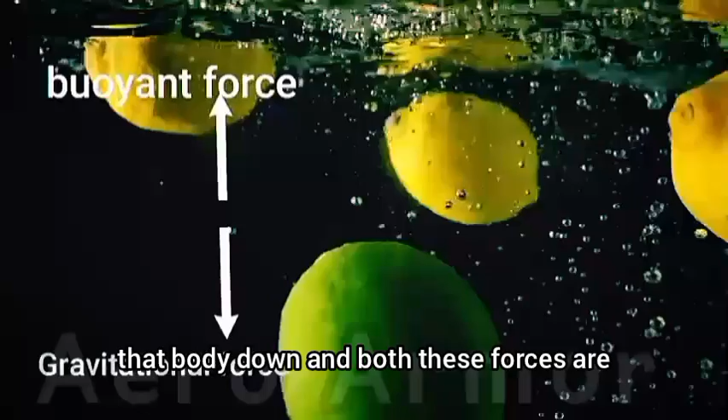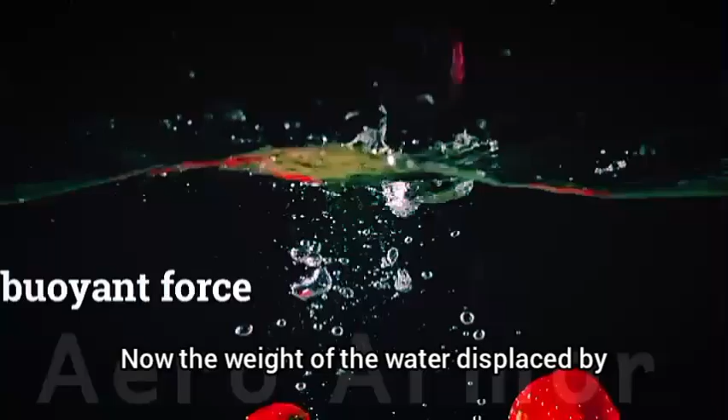When any body is in water, the water exerts an upward force on that body, which is called buoyant force, and the gravitational force tries to pull that body down, and both these forces are available in the water. Using buoyant force, Archimedes gave a principle that when a body is immersed in water, that body will start displacing water. Now, the weight of the water displaced by this body will be equal to the buoyant force exerted on it. It is very good, but still we do not understand anything.

The weight of this submarine of ours is 48,000 tons. When it stays above the water, it is assumed that it can displace only 40,000 tons of water. Now it will be equal to 40,000 ton buoyant force, which means 40,000 ton water is exerting upward force on this submarine. But I just told that there is also a gravitational force whose formula is mass times gravitational acceleration.

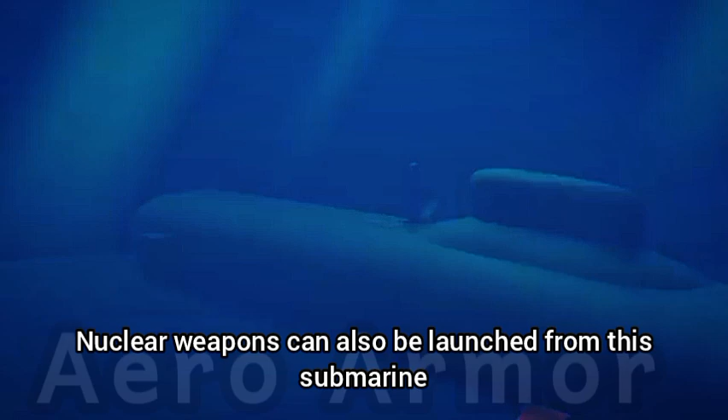The large ships displace a lot of water so that the gravitational force does not dominate and the ship moves comfortably on the water. The Typhoon class submarine is still with Russia, whose power we are yet to know. Nuclear weapons can also be launched from this submarine, and it simultaneously carries so many weapons that the whole Earth can be destroyed. This submarine is 574 feet long, 76 feet wide, and 38 feet tall.

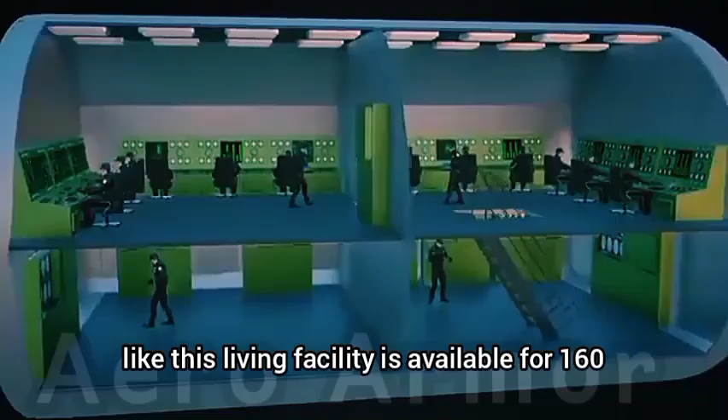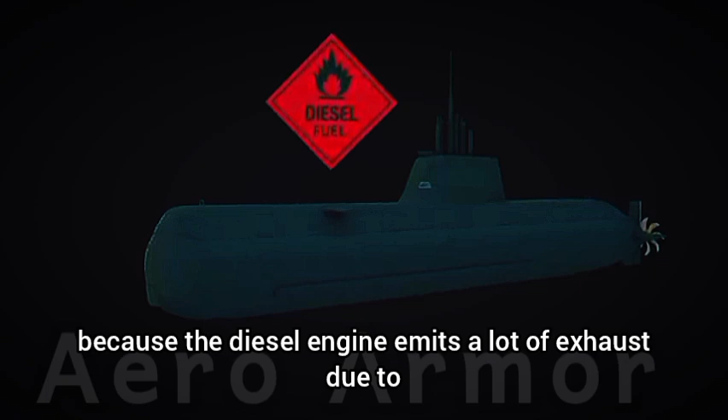If it is compared to a human, it will be something like this. Living facility is available for 160 people in this submarine, and it can stay underwater for 120 days without coming out, whereas diesel-electric submarines have to come up once in 10 to 15 days because the diesel engine emits a lot of exhaust, due to which bubbles are created in the water and its privacy is lost. That's why the diesel submarine charges the battery on the surface and then goes back into the water.

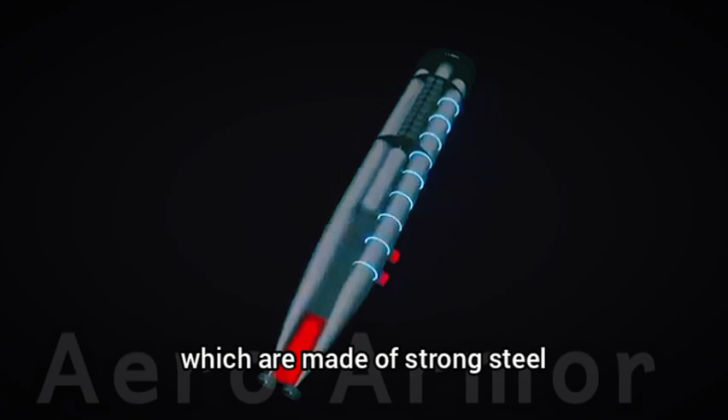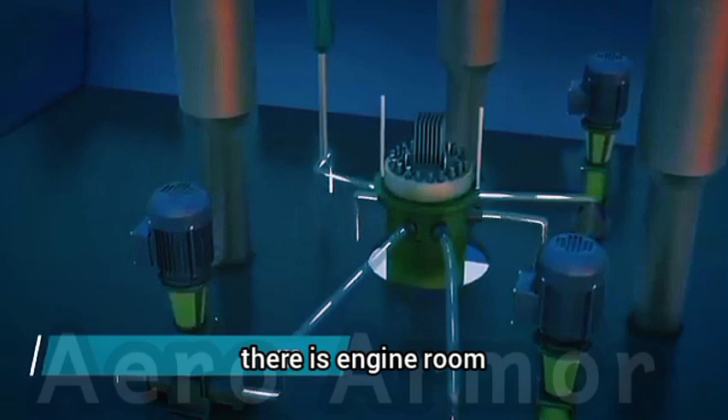The outer body of the submarine you are seeing is called hull, but inside it there are total 5 hulls. There are 2 large main pressure hulls on the side, which are made of strong steel, and each hull is divided into 10 compartments, and in these compartments sleeping room, kitchen, bathroom, gym facilities are available for crew members. On the rear side there is engine room that has the nuclear reactor for power generation and propulsion of the submarine.

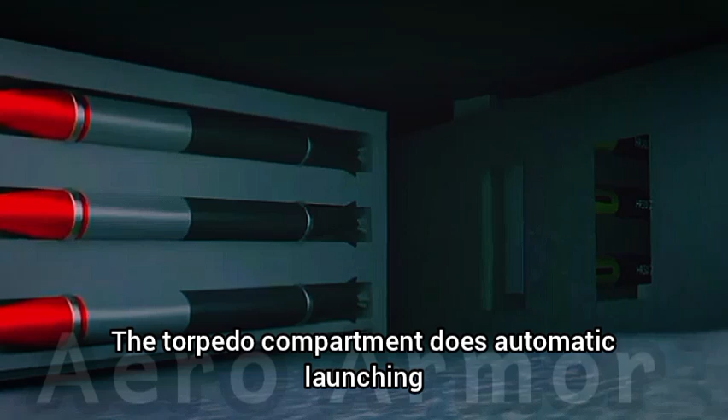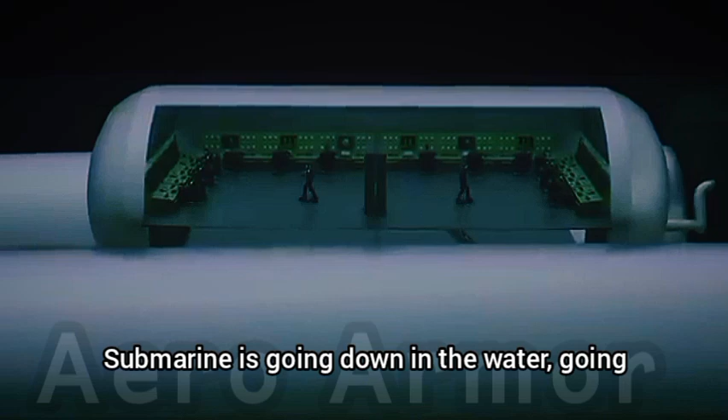The submarine has a torpedo hull at the front from where the missile ammunition is launched. The torpedo compartment does automatic launching, just needs to be signaled from the control room. And the control unit of the submarine is in its center portion from where the crew members work. Submarine driving control, submarine going down in the water, going up, surfacing, etc. All are controlled from here.

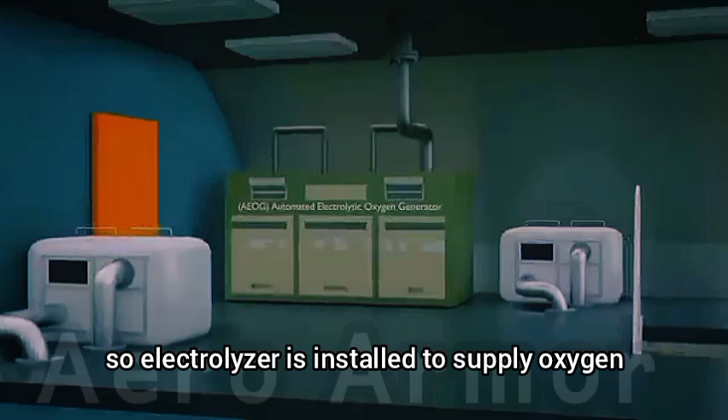But the interesting thing is that there is no window to see outside the submarine. Everything is controlled through sensors from its control room. Submarine is just like a box, which makes minimum movement with water. Inside things inside, outside things outside, so electrolyzer is installed to supply oxygen to so many crew members. Electrolysis is a process in which oxygen is extracted from water.

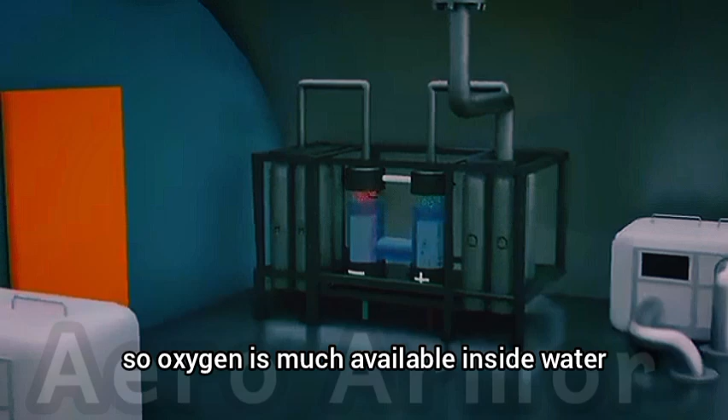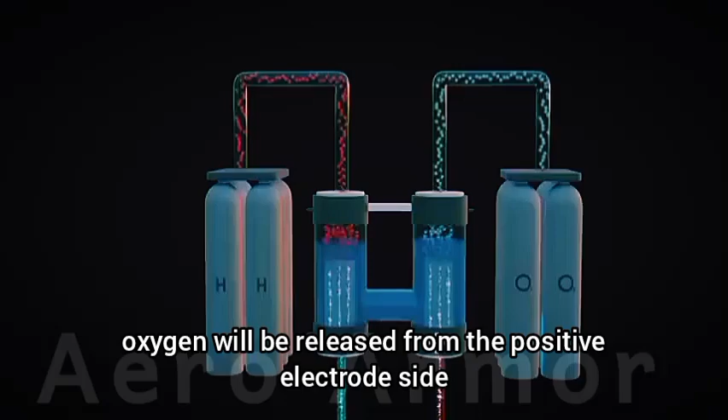If you know, oceans supply 50% oxygen on Earth, so oxygen is much available inside water, but electrolysis is used to separate it from water. There are 2 graphite rods in different chambers. When DC supply is given to them, oxygen will be released from the positive electrode side, and hydrogen will be released from the negative electrode side. Both these gases are stored in separate tanks. Oxygen is supplied to the entire submarine through these pipes, and hydrogen is released outside.

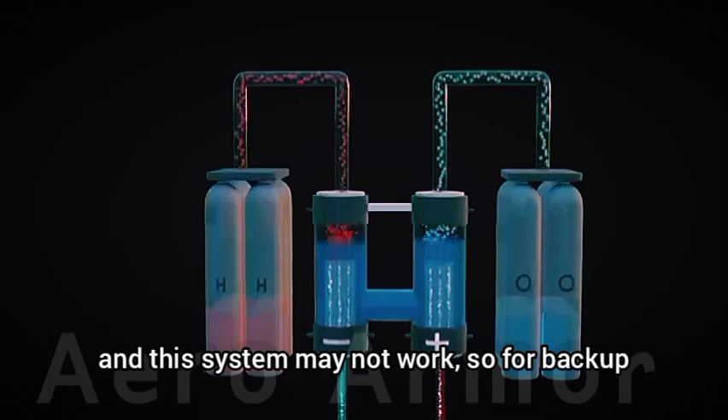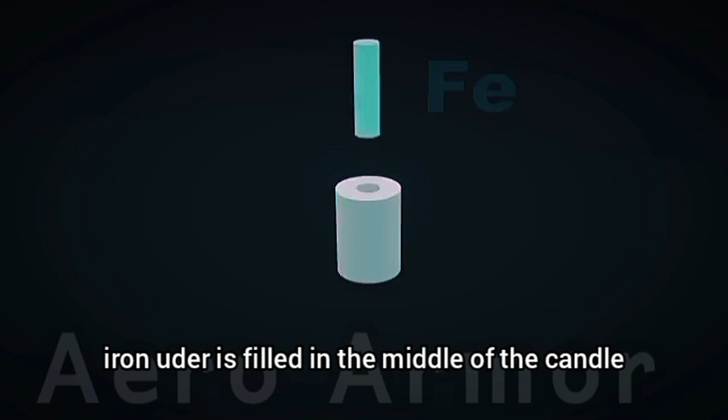The submarine has a powerful electrolyzer that produces 4,000 liters of oxygen in 1 hour, yet oxygen is supplied periodically. There may be a power failure and this system may not work, so for backup, chlorate candles are used for oxygen supply, which do not require any external power source. These candles are sealed in a steel canister. Iron powder is filled in the middle of the candle, and sodium chlorate on the side.

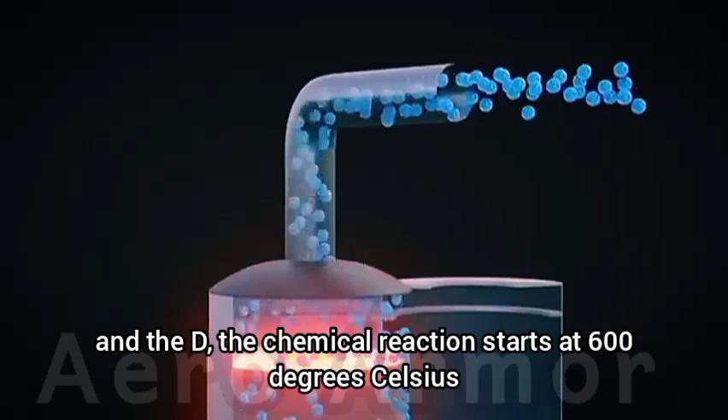So when oxygen is needed in emergency conditions, iron powder is ignited, which generates heat. And the chemical reaction starts at 600 degrees Celsius, and oxygen is released in tremendous amounts.

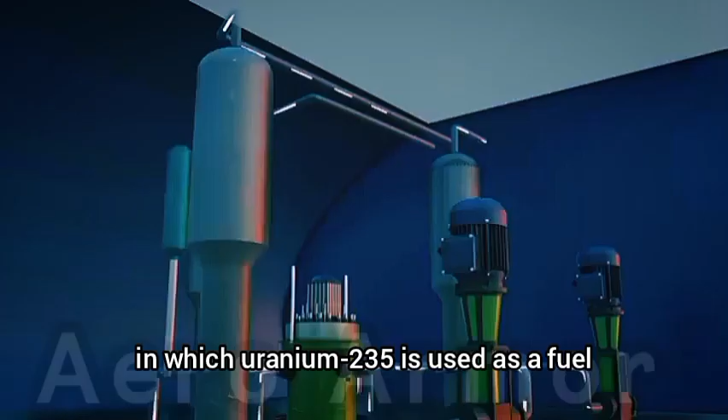In a nuclear powered submarine, a nuclear reactor is used for power generation and to propel the submarine, in which uranium 235 is used as a fuel. This reactor can generate continuous power even underwater because, unlike a diesel engine, it does not leave any exhaust outside.

If we compare it with the diesel electric submarine, then 5 million liters of diesel is equivalent to 4 kilograms of uranium. And the more interesting thing is that there is no need to come out to refuel a nuclear powered submarine, because when the submarine is manufactured, so much uranium is filled in it that it does not have to do any refueling for the next 30 years, because uranium is not like diesel or petrol,

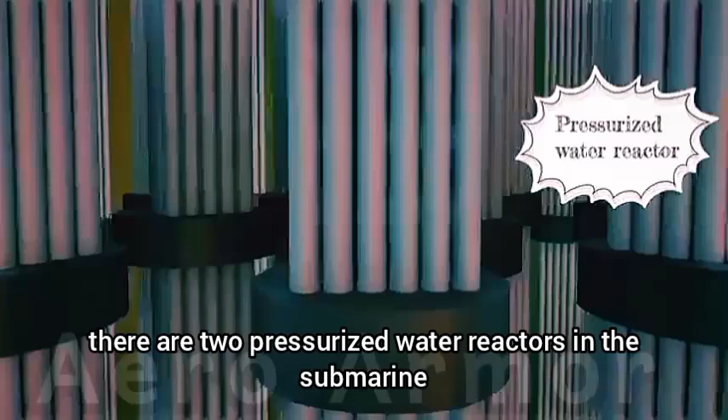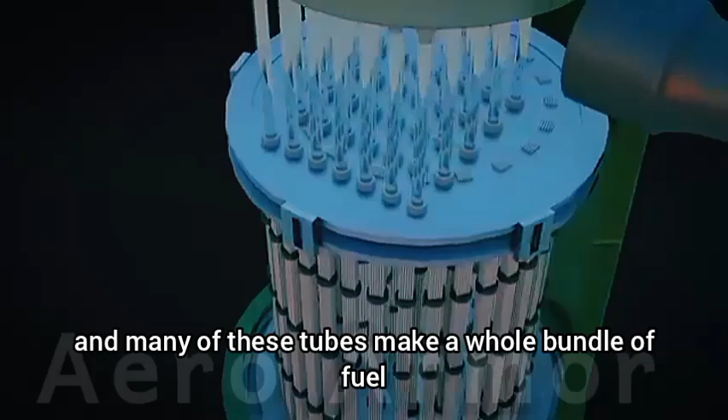Now, coming back to the topic, there are two pressurized water reactors in the submarine, in which there are many such tubes. Inside these tubes, small pellets of uranium are sealed in a metal tube, and many of these tubes make a whole bundle of fuel, and in the reactor, they are set in this way. When the reactor has to be started, the process of nuclear fission is started here.

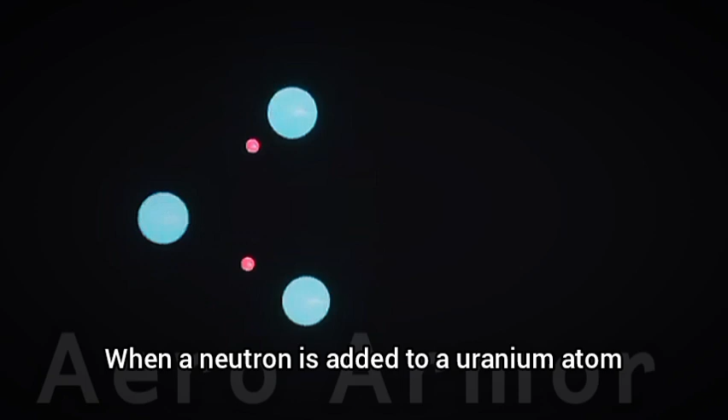When a neutron is added to a uranium atom, it breaks into two atoms, and neutrons are released from this break, and energy is also released. Now, both these neutrons will attack the next atom, due to which the next atom will break again, and energy will also come out, and neutrons will also come out. In this way, a chain reaction takes place here.

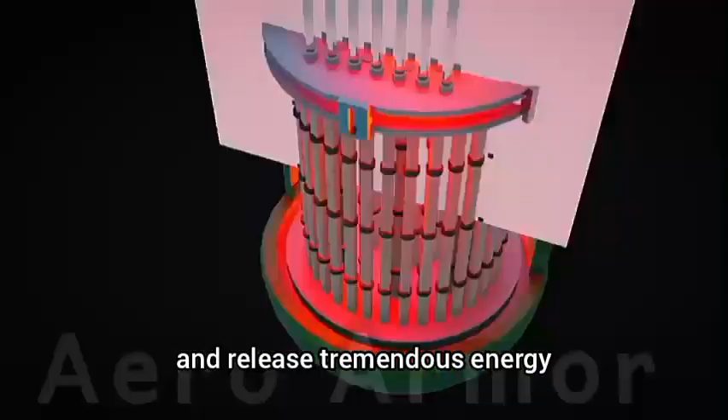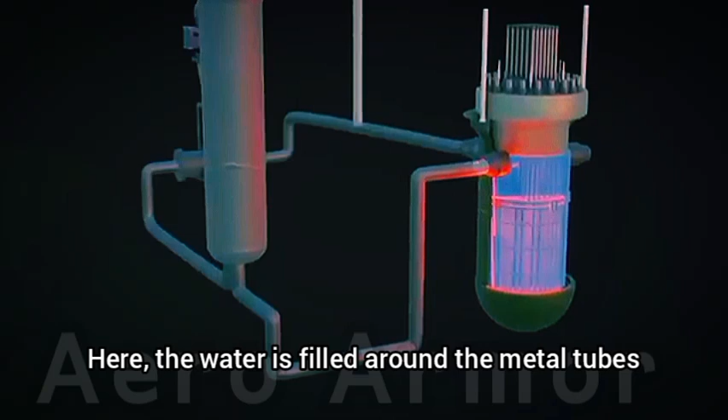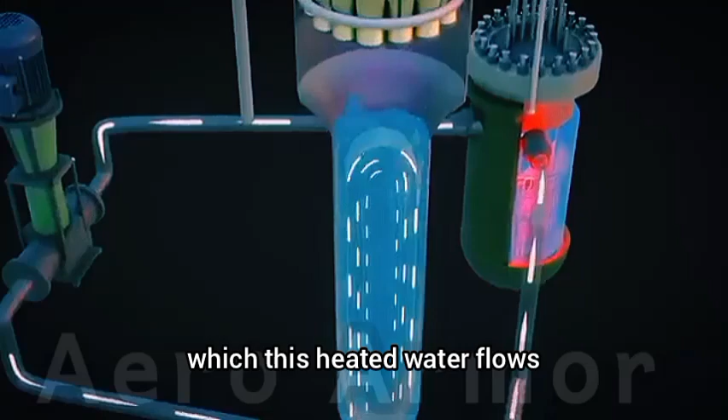Here, the water is filled around the metal tubes. Then, when energy is released from the fission process, the water is heated by it and sent forward to the steam generator. There are many U-shaped tubes in the steam generator through which this heated water flows, and there is another source of water inside the steam generator, so when this water comes in contact with the reactor water, it will get heated and turn into steam.

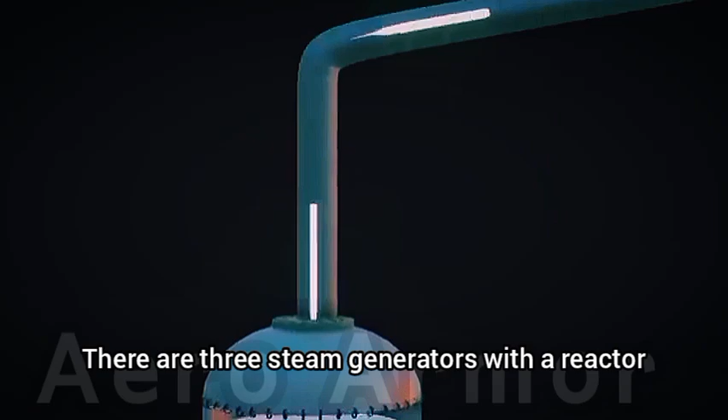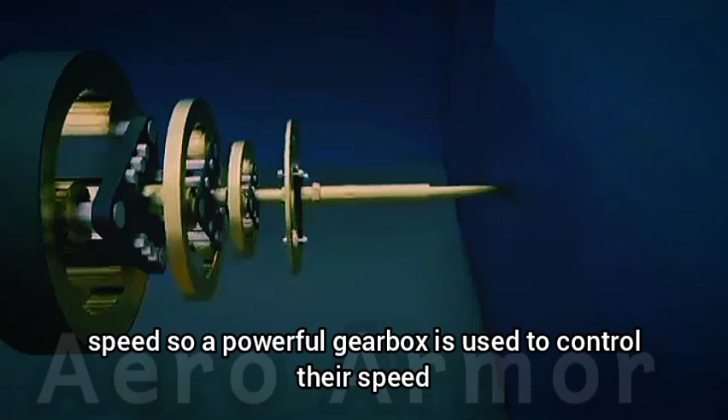There are three steam generators with a reactor, and steam is sent from these steam generators to the turbines, which rotate the turbines. Now, the power of the turbine is not given directly to the propeller because the turbines rotate at a very high speed, so a powerful gearbox is used to control their speed, and the power of these gearboxes goes to the propellers that propel the submarine forward.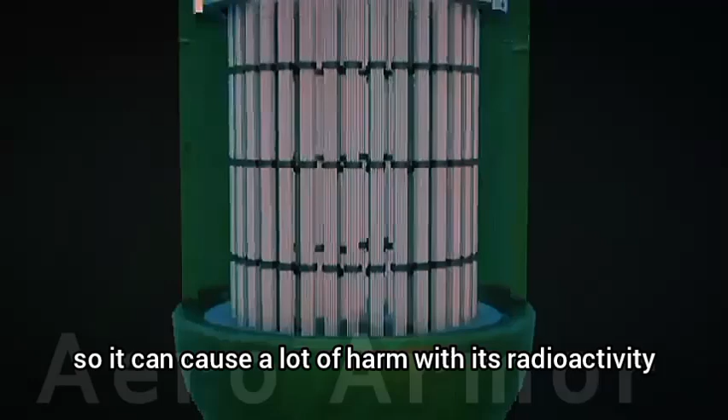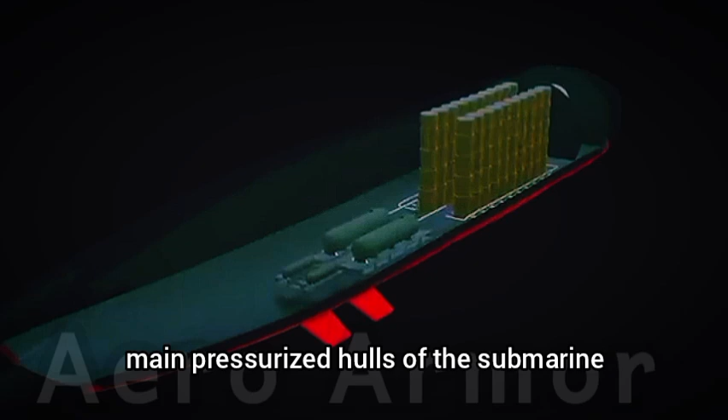You know, uranium is a radioactive material, so it can cause a lot of harm with its radioactivity, so the reactor is packed completely. Nuclear submarines carry many weapons. This submarine can also launch missiles, and the missile system is between the two main pressurized hulls of the submarine. But it is a matter to think that the rocket engine needs air to burn, so it cannot run in water. Then, how is the missile launched from the submarine?

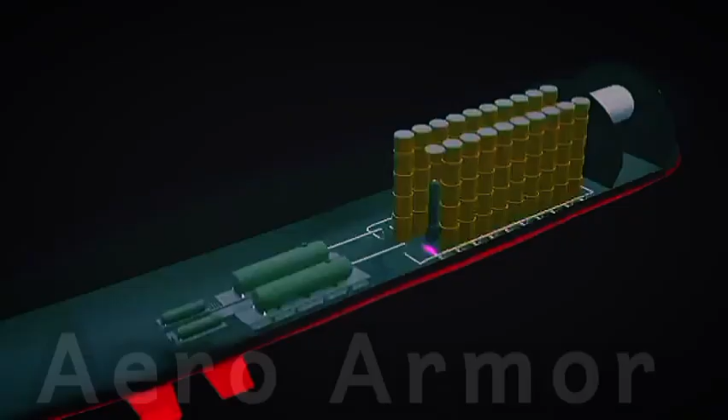When the missile has to be launched, its cap is opened and there is a launch tube under this cap. The launch tube is also packed tightly so that water does not go into it. Compressor tanks are used to launch these missiles, so when the rocket is to be launched, the compressor tanks will start compressing the air under the launch tube.

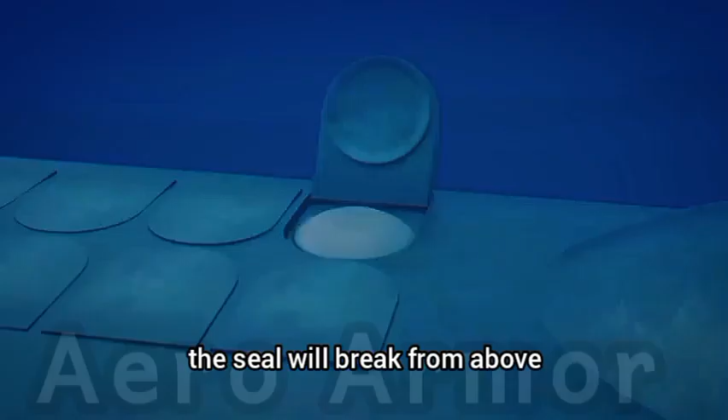When the pressure increases, the seal will break from above, and this air pressure tank exerts so much pressure on this missile that the missile will be launched from the sea at 80 kilometers per hour speed. This pressure is sufficient for the missile to reach the surface, and as soon as it reaches the surface, its fuel will ignite and it will start moving towards its target.

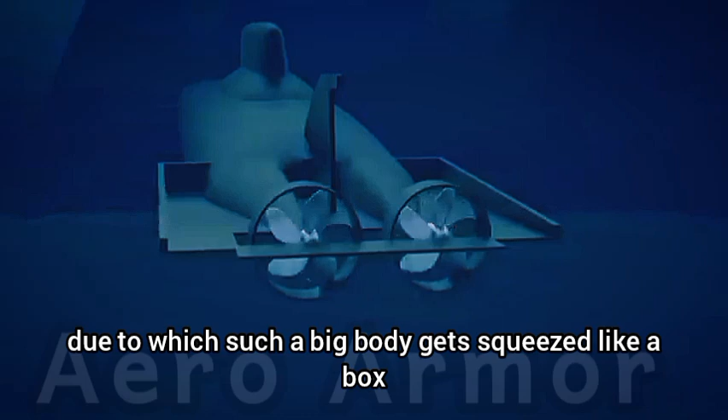A submarine can go 400 to 500 meters or up to 800 meters. In deeper water, the ocean puts a lot of pressure on the submarine, due to which such a big body gets squeezed like a box, so a submersible is used to go to greater depths.

Power generation continues in nuclear powered submarines, and unlike diesel electric submarines, they do not have to carry extra batteries and fuel, due to which their power has increased a lot, but their cost is 2 to 3 times more than diesel electric. We talked about many facts related to submarines in this video.